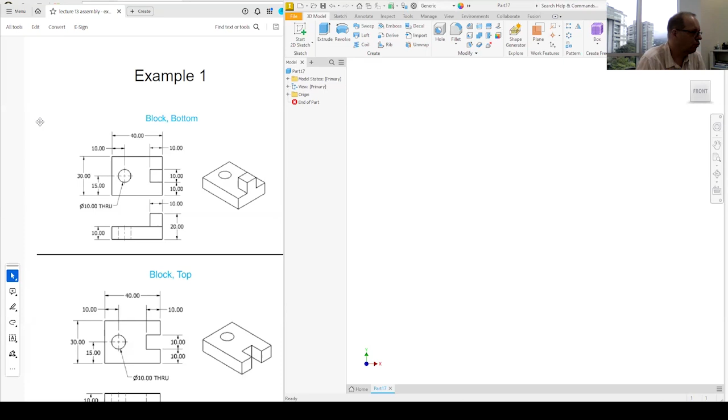In this example, we're going to create a set of parts. So basically you have these three, and we're gonna do an assembly of them. So basically we're gonna stick them all together so that they become one overall object. To do that, we first have to create these three parts.

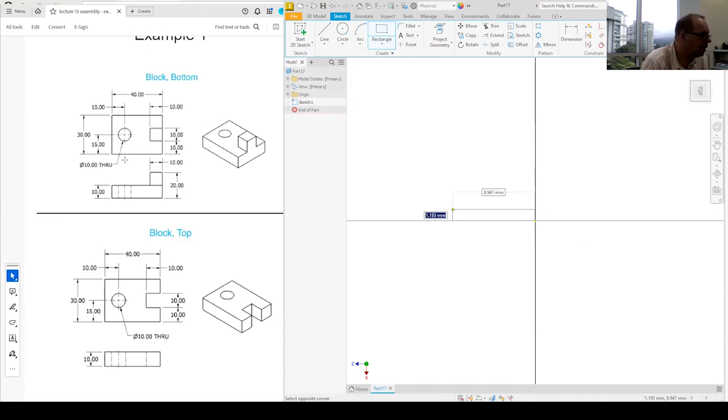We'll start with the bottom block here, pretty straightforward. Just draw the rectangle and go from there. Start with our rectangle. It's supposed to be 40 by 30. So 30 in this direction, 40 in the other. Click on our box to zoom in. We might as well put the hole in there right away. So we'll do a circle.

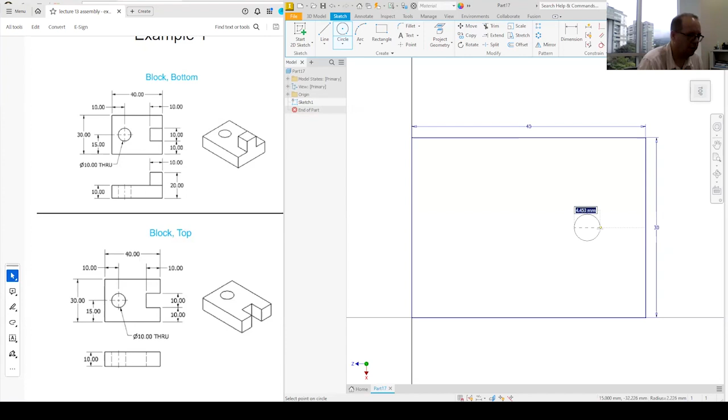So we can grab the center point here. And then we're supposed to be 10 from the edge. So that would be at 30. So let's just hit the tab button and say minus 30. And then it has a diameter of 10. And say finish. And we'll extrude. And it's supposed to be 10 thick, so that's all good. Now we have the hole.

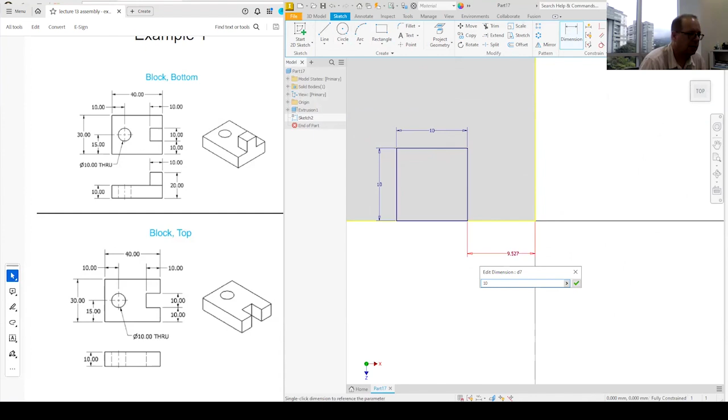All we need is the little block here. So let's do a sketch up here. New sketch. We'll do a little rectangle starting on that line. It's supposed to be 10 by 10. And it's supposed to be 10 from the side. Dimension, this line to that line is 10. And we'll say finish. And we will extrude that one, and that goes up another 10. All right, so that's good.

We'll save that. Go to the right folder here. Where are we? Our assembly example 1, part 17. So my Inventor's been open for a little bit. We'll call that the bottom block and say save.

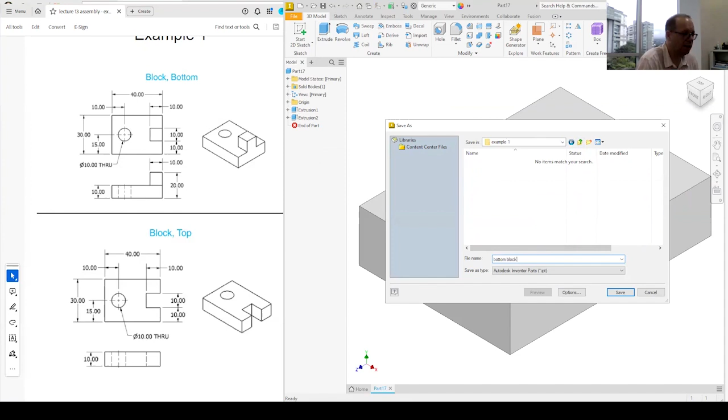Now for the top block, looks pretty much the same. It's just that instead of this going up, it goes down. So I think what we'll do, we will just reuse this one. You know, we don't have to redo the bottom part. We can just take that as is. So what we'll say is file, save as, and we'll call it the top block.

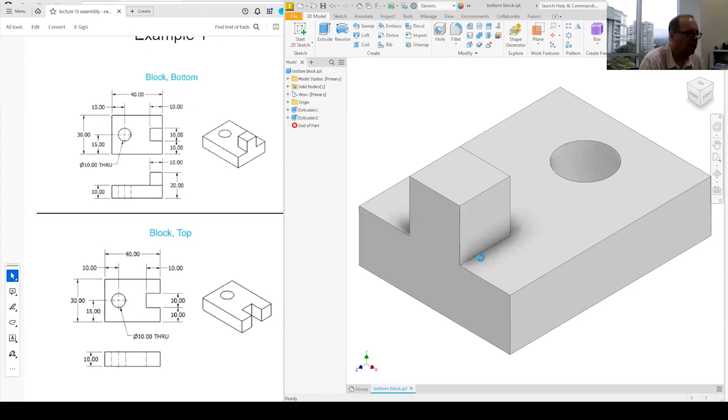And then really, all we have to do is change the extrusion here, right? Just to have it cut instead of a join. So we'll say edit feature. And then we'll say cut. And we'll say this direction. And there we go. Let's not forget to save, though. So that is that. We have those two.

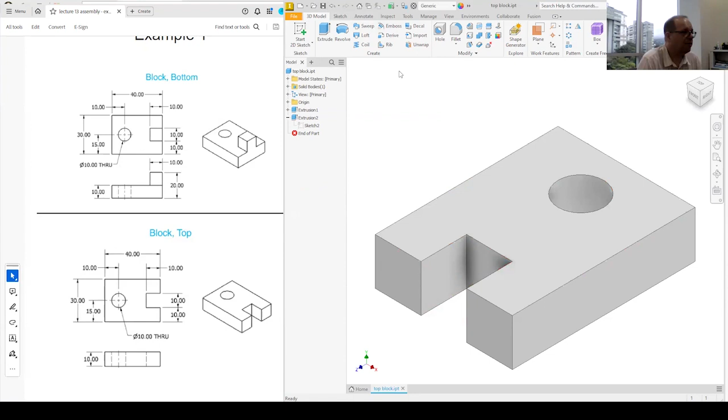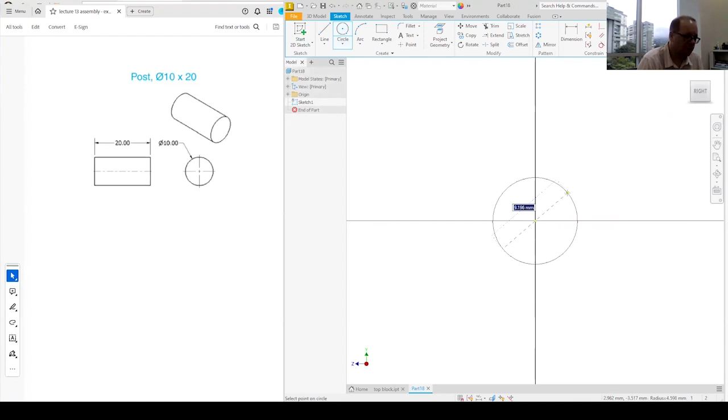And then what else? Well, we'll need the little peg here. So this one will need a new one. Standard millimeters. Do a sketch on whichever we want. Doesn't matter. Diameter of 10. Put this anywhere we want it to, but why not the center? And then we'll extrude it to 20. Oops. Click on that first. 20. And we'll save that, and maybe we'll call that post. That's what it says there.

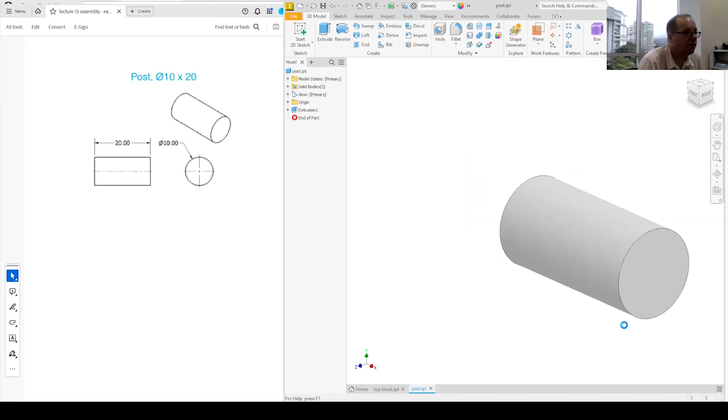All right, so now we have all of our parts. Very good, which means we now have to create an assembly. So we'll go in here. We'll do a standard millimeter assembly. Create. And here we go. I like to be in my isometric view. So first we have to place our parts.

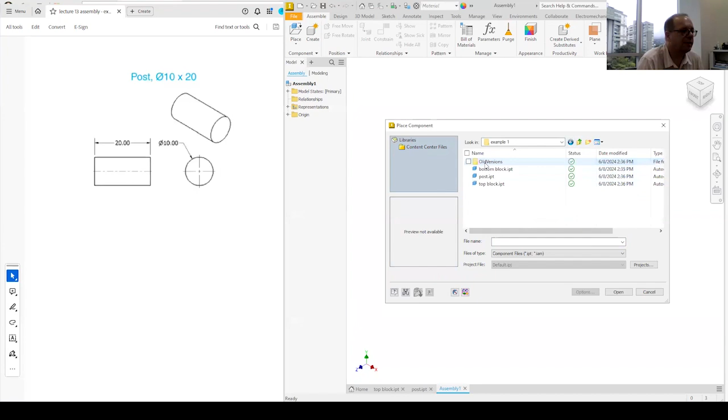So we will start, this is not the right folder at all. Lecture, it's not even the right year. We are completely off. Summer 24. Lecture 13. There we go. Example 1. Now we have it. So we said start with a bottom block. Open. Now we'll see it sitting here.

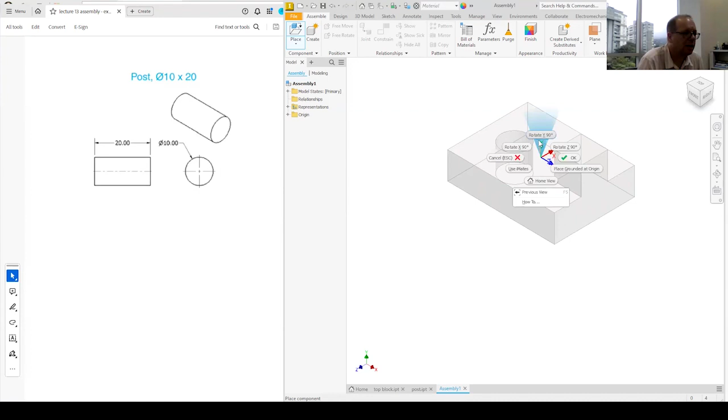Doesn't matter how we want to place it. Maybe we want to place it with a kind of knob thing towards the back. So we could right click and we can rotate it around the y-axis. And another one, and another one, and then we'll left click, right click, and say okay. So now our first part is in here, right? So we can grab it, move it around if we want to, but it's supposed to be staying in place.

So let's right click on this one and then go and look for grounded right there. Click on that, and then we'll see that we now have this little pin on here, right? So we can no longer move it, and we'll see that now the dot is filled in. So it is fully constrained in its location. So that's very good. Let's place another part.

Let's do the top block. It doesn't matter how we place it. All right, so this one we can still move around. And we'll want to place it in a way that it fits into here. But I think what we'll do is we'll place the peg in here first to make it more obvious. Post and say okay. Now we want to move these all together.

All right, so we'll hit the constraint tool. Bring that over here, we can see it better. And now we have a peg that's supposed to go in a hole, so we'll do the insert one. So we'll take the bottom of this pin, the bottom of that hole, and flip this around so it looks in the right direction. And we say okay. And now it can no longer move up and down. It can still turn in the circle. That's why it's not filled in, right? But otherwise it is kind of stuck in place.

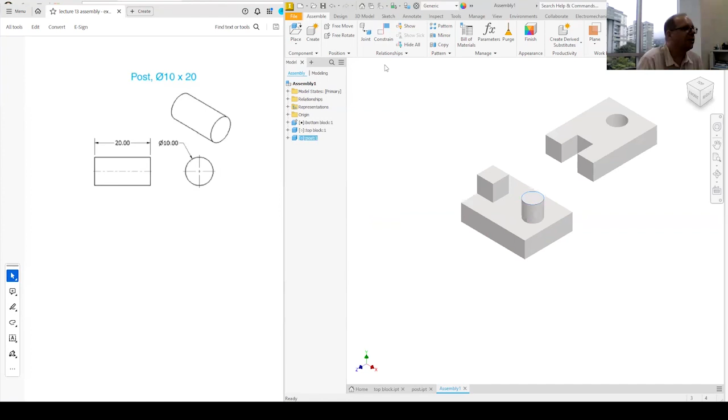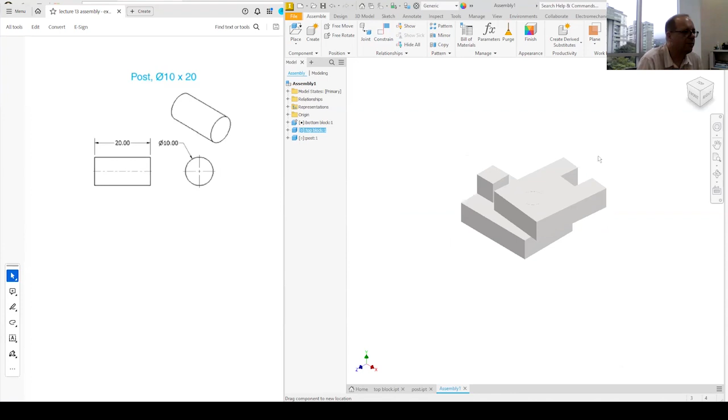Well, now if we want to get the top to be stuck on that, we can do that too. So we'll do another insert. We'll do the top of this hole, top of that. Again, flip it around, say okay, and now, this part is constrained to a degree, right? It can't move up and down. I can only turn it because that's all that's left.

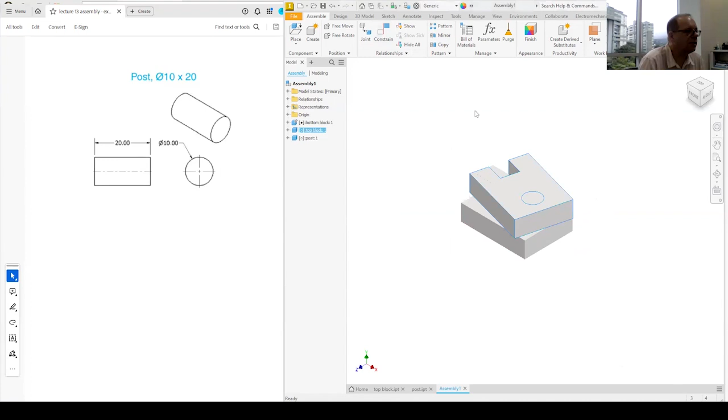So if I want to stop it from turning, right, it's not enough that there's a peg. It's not like a physical thing where it bumps into it or something. I have to tell it to be in a certain place. And maybe we can do that by saying that these two surfaces are supposed to be aligned. So we could do that with a mate and actually with a flush. We say this and that are flush.

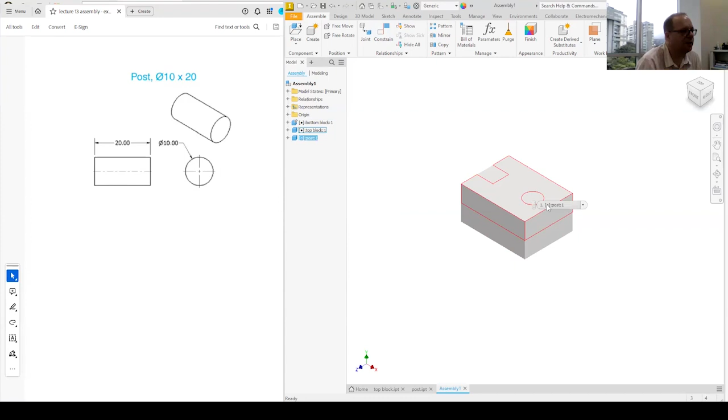And we say okay, and then we'll see that we can no longer move this, right? It has the little no-go sign on it, and has the filled out circle here. The only reason why the post doesn't have the filled out circle, again, is because I can turn that post in place. All right, so that basically is a very quick run through of how to create a very simple assembly.